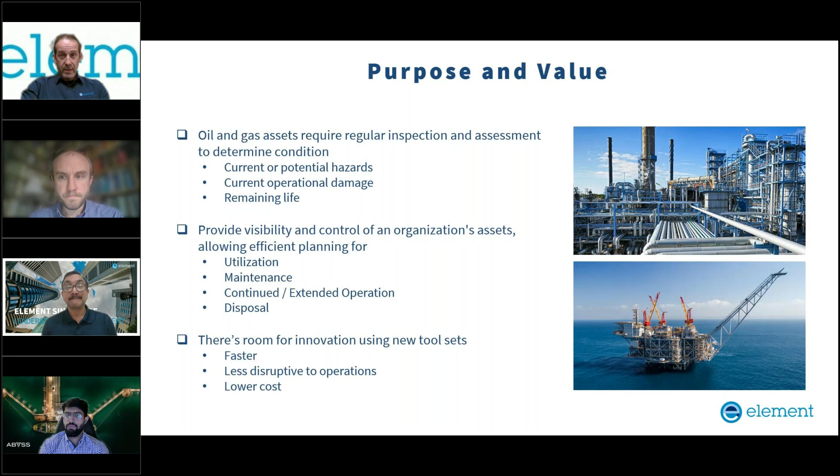So a little bit more on the partnership. We're combined with Abyss Solutions, Element Singapore, and Element Digital Engineering in Cambridge to work in partnership across the life cycle to deliver that solution. And that's a bit of a sales pitch.

All of that information, the point cloud data, the geometry, the replication, the chemical data, etc., that was all sent to the guys in Cambridge, who were then able to very quickly and effectively put together a very bespoke finite element analysis and structural analysis that then supported a fitness for service assessment. And it's a really efficient, really fast process that I'm really confident with, and I think it will transform the way that these things are done.

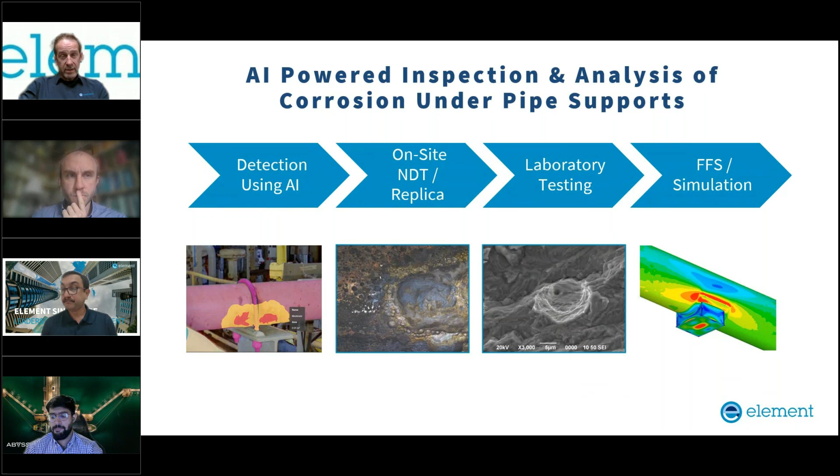So over to the speakers. First up will be Hamza Alam, who's based out in Abyss's operations in the Middle East, Asia Pacific. He's an operations manager in the Middle East. He'll be talking about what Abyss have done to quickly inspect this plant. He'll then hand over to Basab, who is a technical lead in our energy operations out in the Element Singapore laboratory. And Rob Kulka will come up last. He'll use the information that those guys have gathered to show you how we can put that together for a structural assessment that gets into fitness for service assessment. So I think it's over to you, Hamza, when you're ready.

Yep. Thanks, John. So yeah, we'll quickly go through what we were given by one of our customers and the problem that we were trying to solve. But before that, how the process actually works for us is a very simple three-stage mechanism where we use some advanced laser scanning devices to collect data from the facility. This data comes to us in the form of laser scan and high definition imagery.

And we convert that data to a usable format before putting it into the processing stage, where we utilize our artificial intelligence algorithms to understand defects, detect them, classify them, and quantify them using the technology, all of which is done through the software automatically.

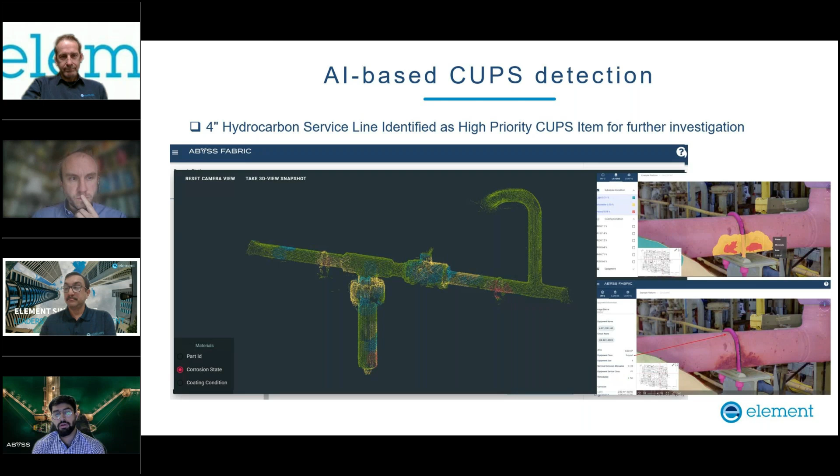And at the end, I think Rob will comment on how this data actually impacted their assessments at the end of data collection, which was more of a finite element type of assessment. So we lumped everything together and transferred it over to the Element guys to kind of take it from there. So I think it's over to you, Basab.

Oh, yeah, a quick one on some of the quantified outputs. So as you can see in the previous slides, we were able to detect and classify the damage, but once we had identified a high priority item, we were able to go a bit further and analyze the data remotely through our system to quantify that damage. How much of a corrosion product buildup do we see? What kind of pitting are we seeing? What is the exact quantity of that damage within that data?

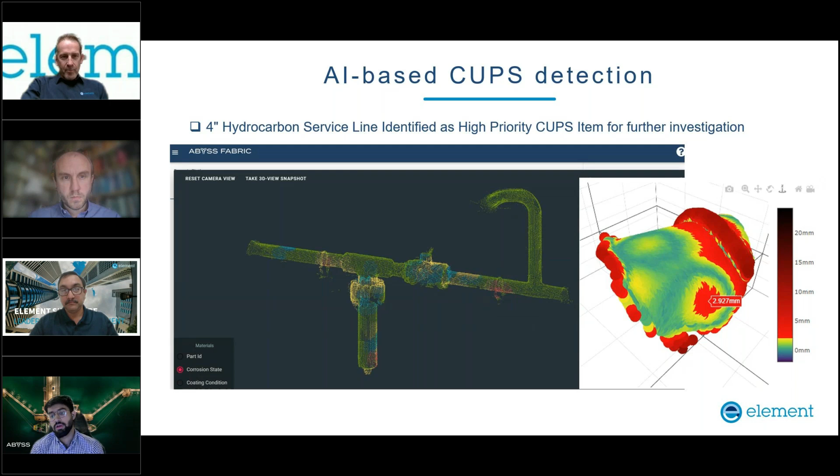Because we're using laser point cloud inputs, we were able to extract this very easily and transfer it over to the team at Element for their detailed assessment. So I believe now it's over to Basab.

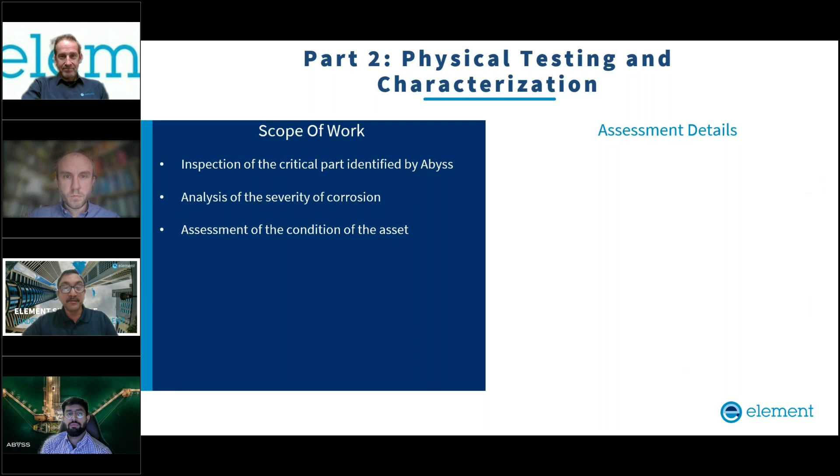Thank you, Hamza, and thanks for presenting this high-end inspection incorporating AI technology, which enables us to locate critical locations much faster. After identifying this location, it was our responsibility as a testing lab to confirm the severity of this corrosion. And when necessary, we requested to extract samples from this location for lab-based analysis. In this slide, we will elaborate the investigation method whereby we found out the damage mechanism.

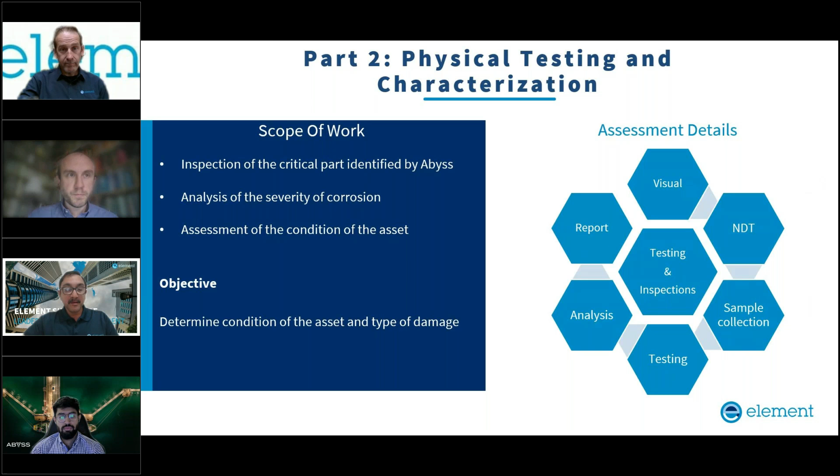Our investigation started as usual with visual inspection, followed by standard conventional NDT. And upon approval, we have taken some samples for in-house lab analysis, and a comprehensive report was supplied to the client. The purpose was to determine the condition of the asset and assess the type of damage. So in the next slide, we will show the damages or corrosion we have found in the pipe.

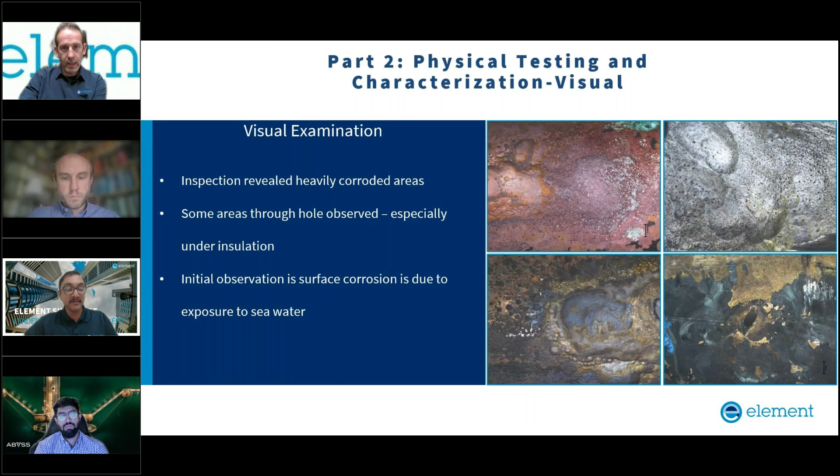Seawater exposure is obvious, and it's due to the sea condition of the asset. Inspection findings highlighted the importance of adequate protective measures such as coating or cathodic protection in a marine environment. We needed to do further investigation to find the extent of severity. Before that, we will talk about some NDT inspection. We have done thorough conventional NDT, and we found mainly surface damage. In some areas, we also found some indication through the thickness by PAUT measurement.

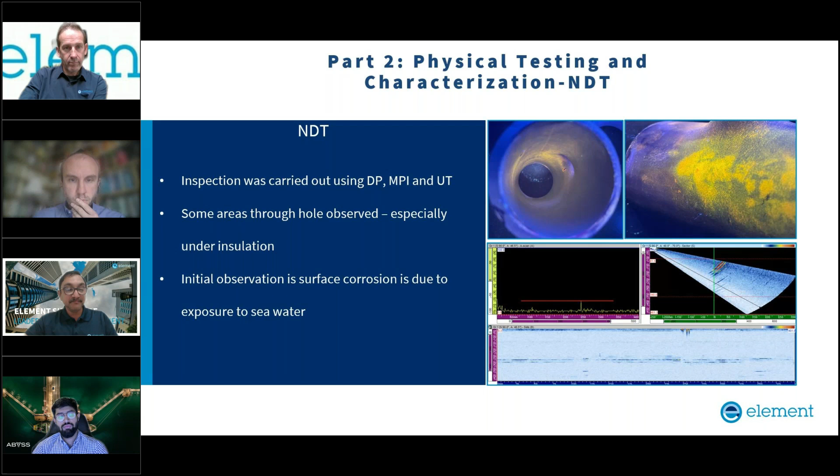The initial observation, visual and NDT, suggested that corrosion is primarily caused due to the exposure to seawater. The corrosion is accelerated due to the moist environment. On-site laboratory and in-lab testing of the material was done.

We first started with replica work at the site. There was no anomaly found. Occasionally, we found some large grain. We have taken hardness. There was no issue with the hardness. So, in summary, we haven't seen any degradation of the material.

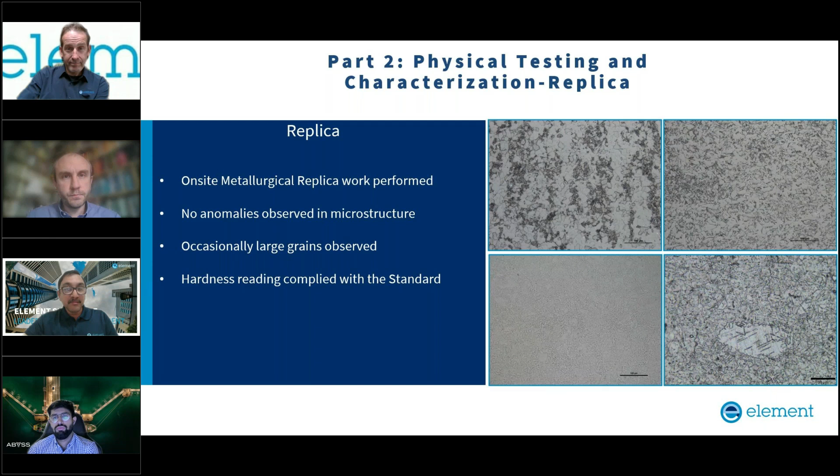We have then done some on-site stress analysis, measurement analysis, because the client requested further analysis like computational analysis to find out remnant life assessment, which Rob will present in his subsequent slide.

And what we have done is we have installed strain gauges at different locations of this asset, and we have collected data for 1 month in XYZ direction, and we have seen what is the strain imparted on the structure due to seawater condition.

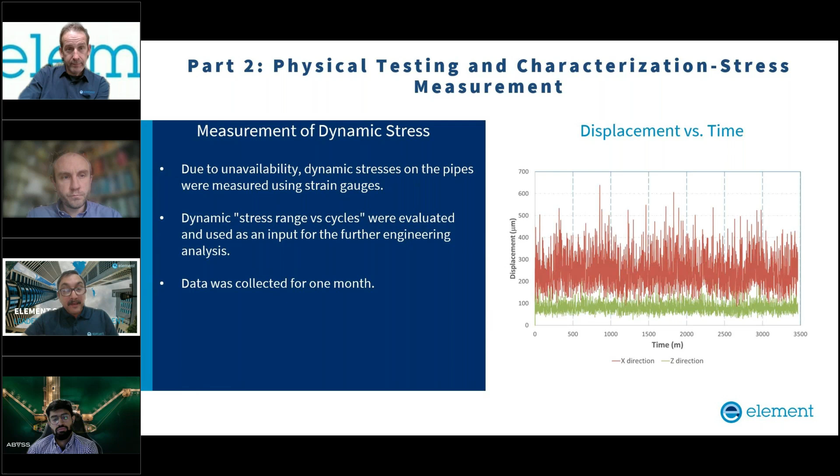The cutout sample, which we are showing in the next slide, we have done macro and micro observation. Again, there was no anomaly in the microstructure found, but we observed presence of pit. And we have done further analysis in electron microscope, which shows presence of pit, and we have done EDS analysis, which shows presence of chlorine. This confirms seawater pitting corrosion on the pipe.

Overall, analysis suggested that material has undergone pitting corrosion, likely due to the exposure to the chlorinated environment. We have done another further analysis of the area where we found a through-thickness crack during UT inspection. So this section, when we cut and polish, we have seen a crack has generated at the pit location due to the environmental condition of the asset.

Once again, there was no problem with the material degradation. Whatever corrosion happened is due to pit, and this has also generated a crack inside the material.

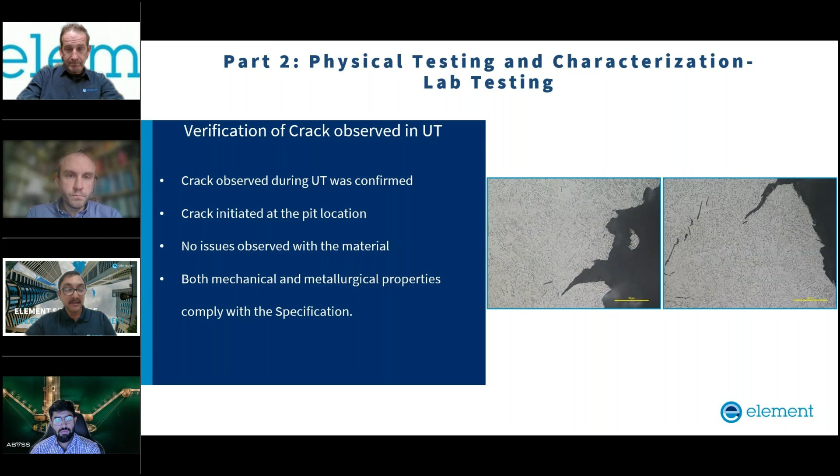In summary, what we have seen is on-site inspection revealed corrosion under pipe support, and this is due to seawater condition. Notably, the state-of-the-art visual laser camera inspection done by Abyss has reduced the time of inspection a lot. Laboratory examination confirmed the presence of pit, and further analysis confirmed that pit has generated crack inside the material.

We have also collected data for stress, which was further used by Rob's team for analysis. This analysis data, including dynamic stress analysis data, serves as a valuable input for computation and analysis, which will be now presented by Rob. Rob, over to you.

Thank you, Basab. So it was really nice to work on this project, because as a structural engineer and analyst, it always really pleases me when we have access to such a wealth of information regarding the damage profiles, the materials behaviour, the damage morphology, local stresses, and so on. So this makes my job a great deal easier, and we can try and employ the tools to get the most accurate representation of what the local response is and how this local damaged area will behave over time. So this is really good.

What all this data allows us to do is really leverage the use of really accurate simulation techniques, such as finite element analysis, that can be used to support fitness for service type assessments. Fitness for service type assessments are often carried out in a very standardized way, often without numerical simulation to support, but often based on hand calculations, very pessimistic representations of a structure, its behavior, its response to loading, its material's resistance to particular types of damage.

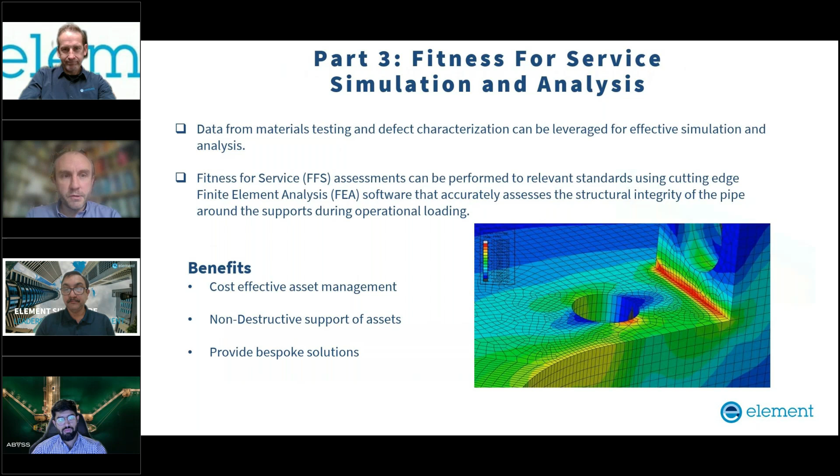So actually having access to all this data and also putting that into partnership with numerical simulation allows us to very accurately say where these areas of damage will be a threat to the integrity of the pipework. So that's what we did in this case, and this really allows us to very cost effectively manage what's going on in the asset.

We can make good, reasonable recommendations as to how the inspection schedule should be optimized, such that there isn't a level of downtime in the plant that is expensive to maintain.

So just getting into a bit more of the detail as to what might feed into one of these types of assessments, and this is the sort of detail that went into our assessment for this case here. We've obviously talked a great deal, and Hamza's brought up all of the very detailed scanning data that can be obtained, the localized morphology of the damage.

We can very accurately have those corrosion maps and the pitting maps and the local inspection of those areas of pitted regions identified by Basab with the local crack-like features, and we can take all of that into account. We can take those corrosion maps, areas of generalized corrosion, areas of localized corrosion with the pitting, and also take into account the very specific morphology of the crack-like features, and feed that all into our simulation, which is what we did here.

So we're able to bring all that damage morphology, a good validated representative approach to what loading conditions are actually being seen through operational conditions, and simulate what the response of the component was to those loads. So that actually tells us a great deal about whether or not those areas of damage that have been seen are safe to remain in place, perhaps until a more convenient time for a shutdown, such that we can minimize the amount of maintenance, the amount of shutdown time on the plant.

So as I've mentioned, the typical fitness for service procedures, such as in API 579, which is one of the highly recognized standardized international procedures for fitness for service, would require that numerical simulation is carried out for complex configurations such as this, where you've got complex geometries like areas of damage sitting underneath pipe supports, where there are stress concentrations, you've got complicated regions of damage and so on. So these, what I term level 3 type procedures, are really useful in this type of analysis that we carried out.

And we can also take advantage of the fact that we can actually assess and model simultaneously areas of corrosion, pitting, and crack-like features, so that we can identify the simultaneous effect that they're having on one another in terms of their crack driving forces, and compare those to the relevant material resistances, whether that be a function of the tensile properties, or whether it be a fracture toughness type property.

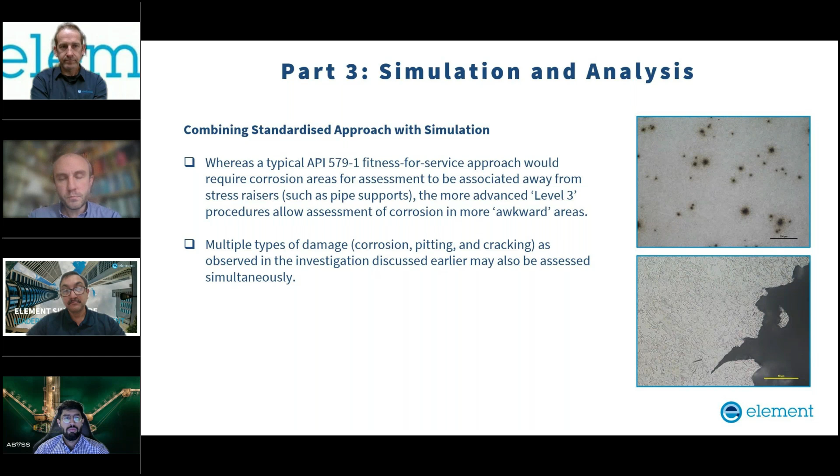And so we were able in this case to demonstrate that the pitting corrosion, the localized corrosion, and the crack-like features that were found were not actually immediately threatening the integrity of the pipework. We were able to demonstrate that, given an assumption of a level of damage propagation over time, those areas of damage would start to become a threat over time.

Through fracture mechanics type assessments in the fitness for service procedures, through iterations on our numerical simulations to see what the effects on the global response of the pipework were to increased levels of corrosion and cracking, we were able to identify what the driving forces of those damages were, and also compare them to the resistance of the material and the structure to be able to withstand those areas of damage.

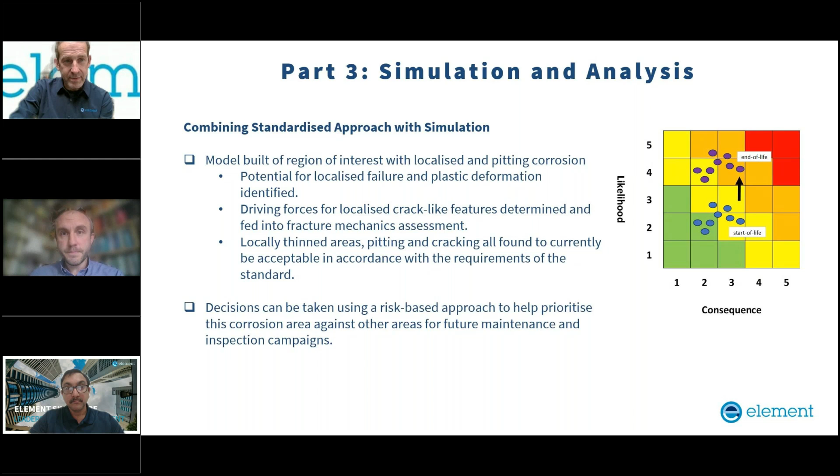Just to summarize, we formed a partnership that we believe adds a lot of value in terms of what we're doing. The autonomous inspections really speed up the inspection process and produce accurate, well-documented records, which I think improve the quality of this type of approach. That allows our colleagues in Singapore to quickly focus on key areas of inspection, and any materials testing requirements that spring out of that, which can be done back in the laboratory.

And all of this data can be used to really help the likes of Rob with their modelling, simulation, and any other work that they need to do to support a fitness for service assessment. I think the value proposition from this is really summarised in those bullet points. It's a valuable process, and I think it's going to speed up this type of approach and reduce the amount of disruption and cost, and allow owner operators to get back to operation as quickly as possible.

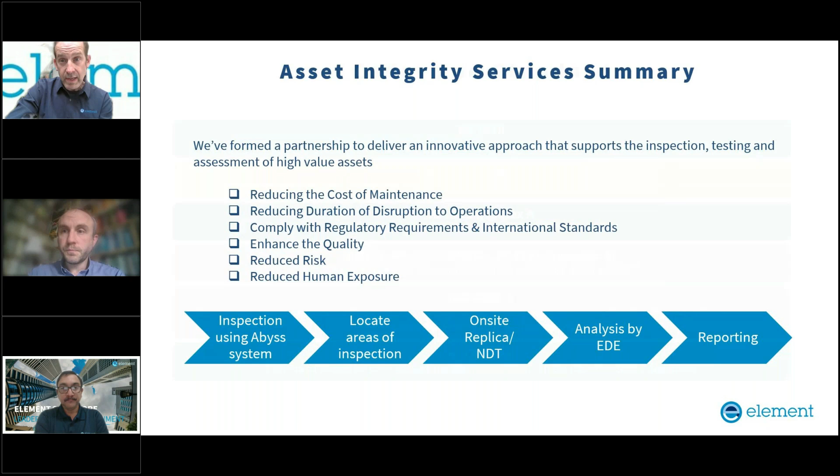Just one last thing to say before we get into question and answer. Codes and standards are very important in this area, in every stage of this. We still rely on the same codes and standards to complete this type of work. And whilst we've changed the approach a little bit and sped things up, we don't need to make any changes to the regulatory environment in order to introduce these methods. So we're confident that what we're doing is in line with modern codes and standards, and it's not necessary to change the environment that we're working in. Just plow on with this.

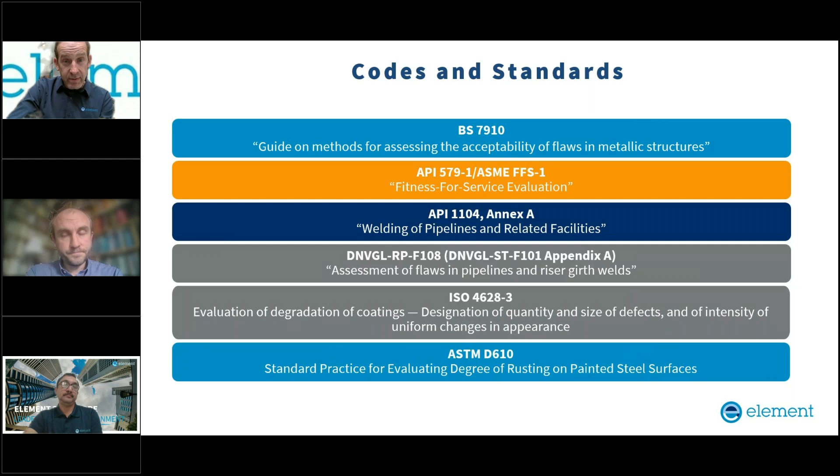We have the first question in from Alson Hafiz: for CUPS inspection, what would be the best recommended practice for inspection as per code? Are you happy to pick that up, Hamza?

Yeah. So as far as code inspections are concerned, with regards to CUPS, what we've seen are two types of industry practices. One is the methods which require the pipe to be lifted before it can be inspected, and certain methods that can only be done while the pipe is in its original place. So in order to get the right information and reduce the downtime of the facility, we've always seen the best output coming from a combination of these methods.

So if an initial assessment is being done while the pipe is in place, which in this case was an AI-based visual inspection, or some other form of fixed sensor installation or some sort of guided wave technique, that is something being used in the industry. And if you have the capacity to lift the pipe for a preliminary inspection, then of course you've got many other methods that you can take into account as per code recommendations.